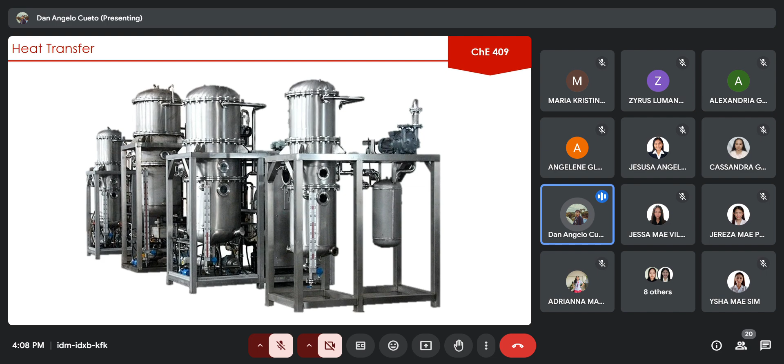To give you a formal definition, in evaporation, the vapor from a boiling liquid solution is removed and the more concentrated solution remains. So what happens here is that from a lower concentration na feed, nakakapag-produce tayo ng more concentrated na solution after the evaporation process takes place.

And in the majority of cases, the unit operation evaporation refers to the removal of water from an aqueous solution. So yun po yung basic concept na meron po tayo when we are talking about evaporation.

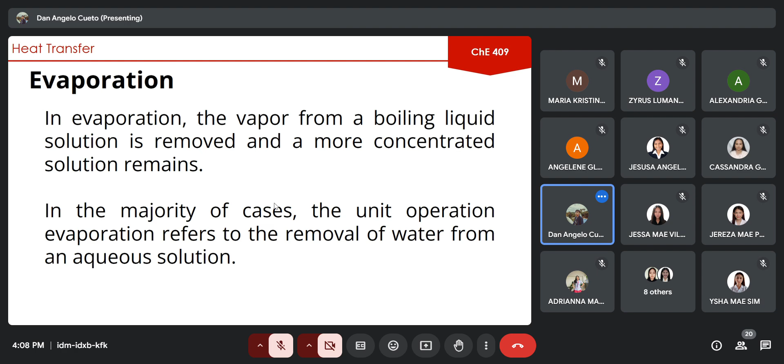So if meron sa inyong taga-Nasugbu or bandang Balayan, Nasugbu na yun. Kung alam niyo, meron tayo itong sugar industry, which is yung sa CADP, yung Central Azucarera de Don Pedro. So one of the major unit operations na ginagamit doon is itong evaporator, in which they produce yung baka nga yung asukal na kinoconsume natin is galing dun sa industry, galing dun sa manufacturing industry na yun.

So aside from sugar, meron din niya mga nakalista yan. Yan yung mga possible na maging product ng evaporators natin. Now, in these cases, the concentrated solution is the desired product and the evaporated water is normally discarded.

Now, in a few cases where ang water natin ay gagamitin pa natin sa mga susunod na process, yung water na nakuha natin dito sa evaporator via steam or via yung vapor na lalabas dun sa taas na part ng ating evaporator, ginagamit or nag-undergo pa siya ulit ng panibagong evaporation na process to further remove the solid particles na na-dissolve doon sa water natin.

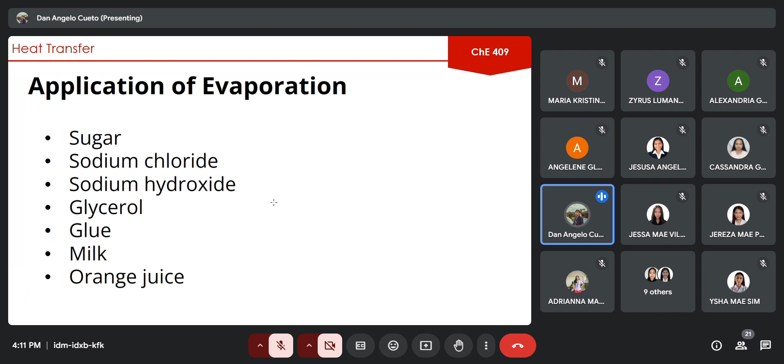Now, another application or another continuation of the evaporation process is yung tinatawag naman natin na crystallization, which is a special evaporation process. So yun yung sunod na unit operations na i-discuss natin after itong evaporation.

Now, moving on, there are some processing factors when we are studying evaporators na kailangan natin consider if you wanted to compute or find the total area needed or whether kung anong klaseng evaporator, anong type ng evaporator yung kailangan nating gamitin is once again nakabase dito sa mga physical and chemical properties na meron ang solution natin.

So ano ba yung mga properties na yun na nakaka-apekto sa processing methods under evaporation? Una na nga dito is yung tinatawag natin na concentration ng liquid natin. So when we say concentration, that is the amount of solute present in a given amount of solvent.

So kapag nag-undergo ng process ng evaporation, kadalasan ang liquid feed natin, kung sinabing liquid feed, yun yung pinapasok natin sa evaporator natin, liquid feed nga, and ito yung nag-undergo ng evaporation.

Itong liquid feed na ito, kadalasan ito ay relatively dilute. Kapag dilute siya, ibig sabihin mas mataas yung amount ng water, kaya magsasabi natin yung viscosity nito ay mababa. And since mababa ang viscosity nito, which is similar to water, mataas ang ating heat transfer coefficient. Isipin niyo para lang siyang tubig na may halong other chemicals.

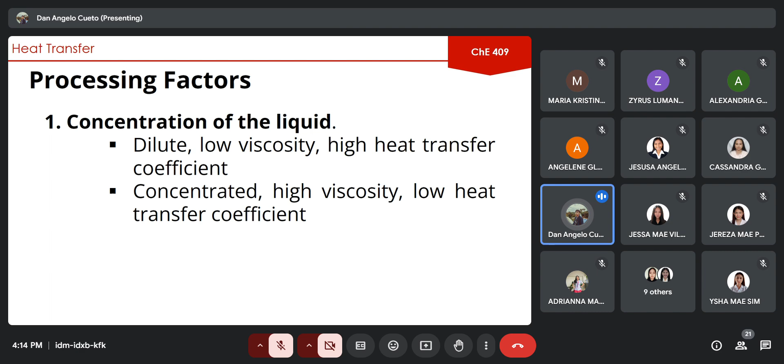Siguro na-discuss na rin naman sa inyong hapyaw itong property ng solubility na tinatawag. Kapag taas ng temperature natin, pagtaas din ng solubility na meron ang ating mga salts or yung mga gusto nating i-concentrate na mga solution.

Isipin niyo siya parang yung basic na example para makita ninyo yung property ng solubility. Diba, pagka room temperature na water ang gagamitin ninyo para magtimpla ng kape, hindi agad magdi-dissolve yung kape natin doon sa solvent natin na water kasi mababa ang kanyang temperature. But if we increase the temperature of our solvent, mas madami pong amount ng kape yung magdi-dissolve. So basically, that is yung property ng solubility natin.

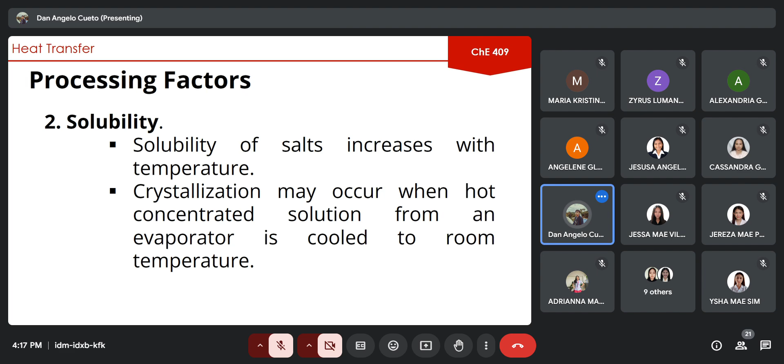Now next is temperature sensitivity of materials. This is also another factor na kailangan natin i-watch out when we are evaporating solutions. Many products, especially food and other biological materials, may be temperature sensitive and they might degrade at higher temperatures or after prolonged heating. That's why we also have to study kung ano ba yung gusto natin i-concentrate na solution, ano yung nilalaman na compound or element or pagkain ba siya. Kasi may mga products tayo na nagde-degrade at higher temperatures at sensitive sila sa pabago-bagong temperature changes.

Now, for example, yung mga pharmaceutical products natin, isa yan sa mga wina-watch out natin during evaporators kasi baka mamaya ang kalabasan na concentrated product natin is damaged na pala or hindi na siya yung pasok sa standard na kailangan natin. Another thing is yung food products natin such as milk or orange juice and other vegetable extracts. So tatandaan ninyo na ang amount ng degradation na meron sa ating food and other biological materials ay function ng temperature at ng length of time.

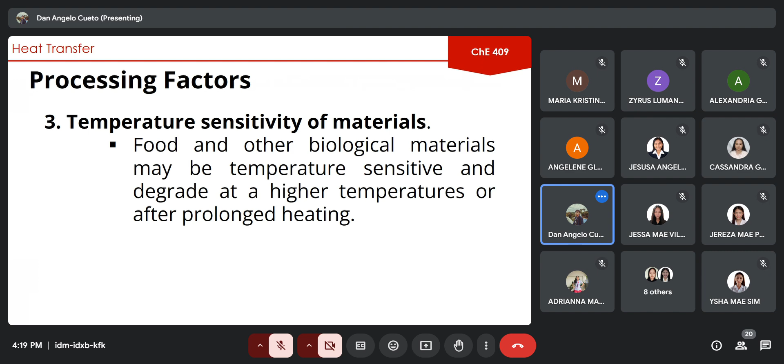Next naman is yung tinatawag natin na foaming or frothing. Ito'y nangyayari kapag yung mga pagkain natin such as skim milk and some fatty acid solutions ay kapag nagbo-boil ay nagpo-form siya ng foaming or frothing na tinatawag.

Siguro, nakapagluto na ba kayo ng sinigang? Siguro, or kahit kanin na lang. Di ba napapansin ninyo nagpo-foam yun dun sa taas kapag sobrang taas ng niluto ninyong kanin, and then yung tubig ninyo is sobra or umaawas, di ba? So yun yung tinatawag natin na foaming or frothing na sometimes wina-watch out din natin if may ganung property yung ating feed. Kasi it might affect the equipment na gagamitin natin.

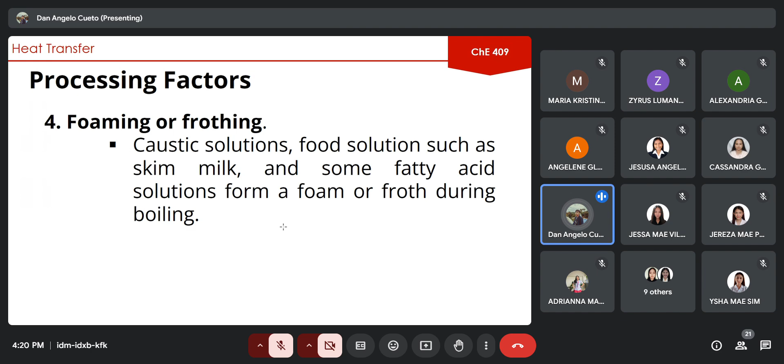Now, moving on, itong pressure and temperature, these two are the most important factors na kailangan nating i-watch out when we are calculating and considering the design for evaporators. Kasi itong pressure and temperature conditions ng ating evaporation process, ito yung magde-determine kung gaano kalaking area, kung anong klaseng evaporator yung ating gagamitin sa isang evaporation process. So one thing na kailangan ninyong malaman is that the higher the operating pressure, the higher the temperature at boiling.

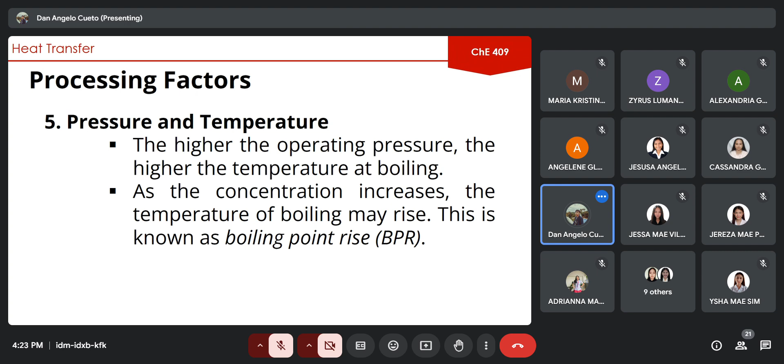And number 6 naman, na factor na kailangan nating malaman and matandaan is that some solutions deposit solid materials called scale on the heating surfaces. So think of it as fouling. Kung maalala ninyo ang ating heat exchanger, one thing na nakakapag-reduce ng heat transfer rate natin is the fouling coefficients or the fouling factor na meron sa ating heat exchanger. So dito rin sa evaporator, may mga solution tayo na nagde-deposit ng solid materials doon sa walls ng evaporator natin. At ang tawag natin doon sa solid material na yun ay scale na nakakapag-reduce sa heat transfer rate natin.

So sabi dito, this results to the decrease of the overall heat transfer coefficients and the evaporator must be clean. So because of scale deposition, nagkakaroon din ng downtime ng mga manufacturing industries dahil may mga scale na nade-deposit sa loob ng evaporators natin na kailangan malinis para yung heat transfer natin, yung calculations natin for heat transfer is hindi maging error yung calculations natin kapag nag-undergo tayo ng evaporation process.

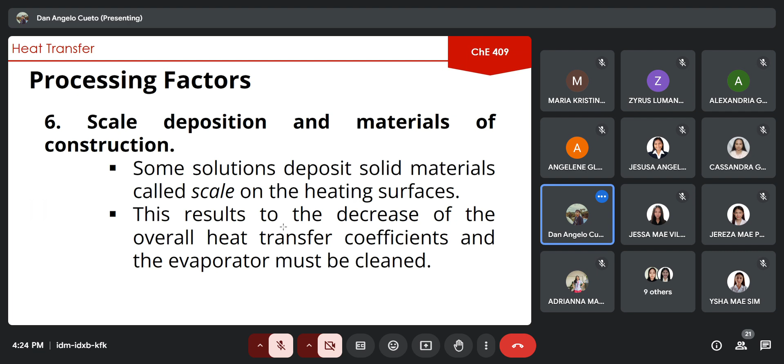Now, moving on with the general types of evaporators. Now, in evaporation kasi, what happens there is that heat is added to a solution para ma-vaporize natin yung solvent. Kadalasan yung solvent naman natin dito is si water. Na itong heat na ito is nanggagaling sa tinatawag natin na steam on one side ng ating evaporator, while dun sa isang side naman is yung evaporating liquid natin.

So think of it as parang may heat exchanger dun sa loob. Dun sa loob ng tubes ng evaporator natin, may dumadaan na steam. Na itong steam na ito yung nagpapainit sa ating evaporating liquid, nandun naman sa kabilang side ng evaporator natin. Na yung type ng equipment na gagamitin natin for evaporators ay nakadepende primarily on the configuration of the heat transfer surface and at the same time doon sa mechanism na ina-apply natin for agitation or circulation ng liquid natin.

Now dito sa presentation, may makikita kayong 8 general types ng evaporators natin. So hindi ko na naman masyadong pakaka-detailin kung ano ba ang ibig sabihin or para saan ba itong 8 evaporators na ito. You can confide with your peers, kasi makikita niyo rin naman itong mga ito sa peers ninyo kung para saan ba sila at ano ba ang purpose nila. But just so you know, isa lang naman ang kanilang concept: is to evaporate and to concentrate dilute solutions to produce a much more concentrated solution while removing the solvent content or the water content present on our feed.

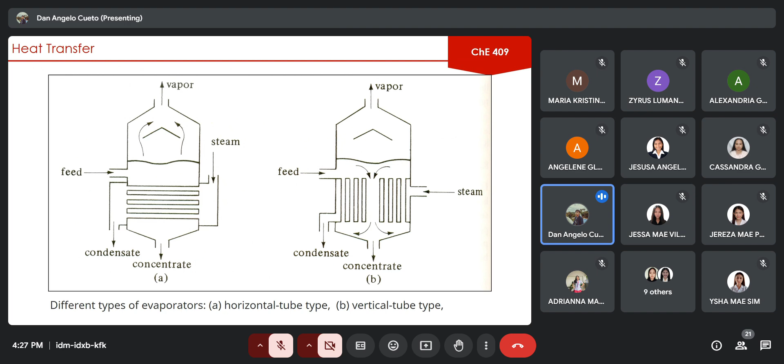So to show you some of the schematic diagrams or visual representations of our evaporators, you can see here, meron tayong horizontal tube type in which makikita niyo sa horizontal tube type is that ito yung dinadaanan ng ating steam. Ito naman sa kabila ay vertical tube type. So makikita niyo dyan kung paano ba ang flow din ng feed natin as well as ng steam natin. Next naman ay long tube vertical type.

And then forced circulation type. Itong forced circulation type, mapapansin niyo may pump na nakalagay dito sa bottom na part ng ating evaporator. So itong pump na ito yung nag-circulate ng ating feed dun sa loob ng evaporator natin para mapataas natin yung heat transfer coefficient na meron yung ating liquid. So itong unang 3 type ng evaporator ay walang pump na ginagamit, so they rely more on gravity as well as yung inlet velocity na meron ng yung ating liquid para mahalo siya.

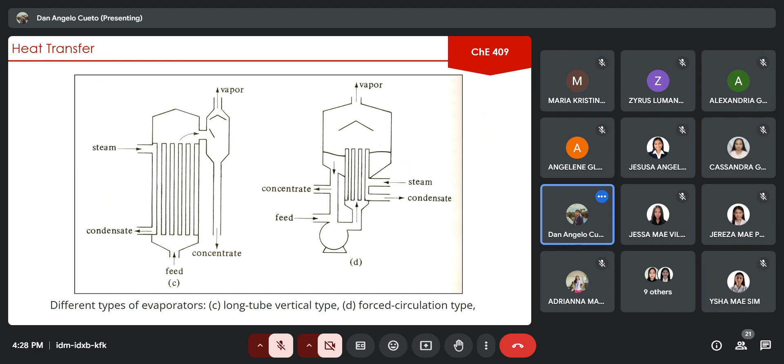So methods of operation of evaporators. Itong methods of operation of evaporators natin pertains to how these evaporators are used inside the manufacturing industries natin.

Una na nga dito is yung pinakasimple na single effect evaporator, in which parang stand-alone evaporator lamang siya. May pumapasok na feed, may pumapasok na pang-init ng feed, may lalabas na vapor sa taas, at may lalabas na steam condensate at may lalabas na concentrated liquid natin.

Na ito namang forward feed multiple effect evaporators, so itong backward feed multiple effect evaporators, this pertains to many evaporators in series.

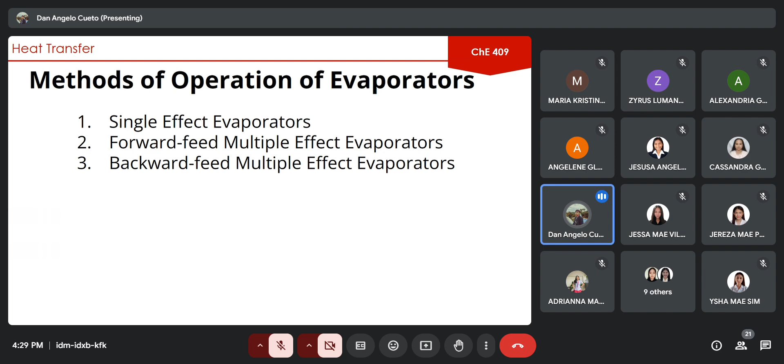Kung yung una ay isa lang na standalone, itong second and third, ito ay maraming evaporators in series. Ang pinakaiba lang nila is paano ba natin ipapasok yung feed, siya ba ay in the same direction of the steam or in opposite direction of the steam? Kaya meron tayo ditong forward feed at saka backward feed na multiple effect evaporators.

To discuss single effect evaporator, which is ito rin yung focus ng discussion or ng calculations natin, kasi yung multiple effect evaporator is sobrang haba, and sa tingin ko kulang 2 oras o 1 oras para mag-solve ng problem na yun. Though, if may time tayo in the next few weeks, I will be discussing kung paano mag-solve nitong multiple effect evaporator. But for now, and tomorrow, ang focus ng computation natin is single effect evaporators.

Now, anong meron dito sa single effect evaporator natin. Dito sa single effect evaporator natin, these are often used when the relative capacity of operation is relatively small and/or the cost of steam is relatively cheap compared to the evaporator cost.

Now, itong single effect evaporator is hindi naman kadalasan ginagamit sa mga manufacturing industries. Though may ilan pa rin makikita siguro kayo na gumagamit itong single effect, hindi kasi siya efficient na gamitan kung nag-iisa lang siya at standalone lamang siya.

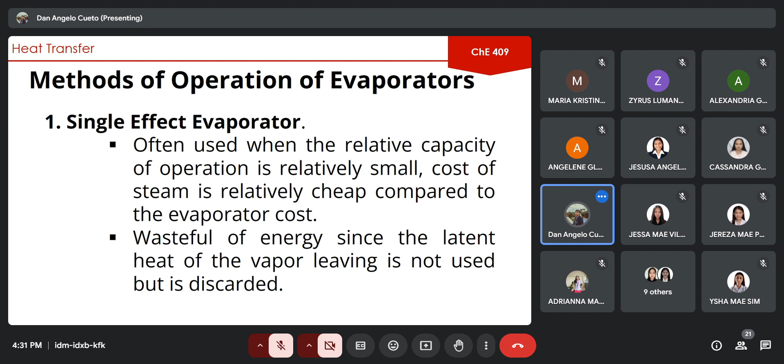So here naman is how you draw an evaporator. Pag nagpa-problem solving tayo, mas magandang i-drawing din yung ganitong itsura ng evaporator natin, para makita ninyo at malaman ninyo ano ba yung mga properties na kailangan nating kunin, masolve at hanapin. So mamaya makikita ninyo yung sinasabi ko.

So in this diagram, makikita nyo naman dyan, yung feed natin enters at a temperature T sub F, as you can see naman dyan sa diagram, and meron tayo dyan saturated steam at T sub S, which enters the heat exchange section.

So basically, may dalawa tayong input sa evaporator natin. Okay? One is the feed, one is the saturated steam.

After the steam enters the evaporator, syempre, itong saturated steam na ito ay magko-condense para makapag-produce ng liquid na lalabas doon sa kabilang side ng evaporator natin. Ang tawag natin dito ay condensate.

Itong condensate na ito, same lamang yung temperature ng sa saturated steam natin. But hindi na siya saturated steam. Siya ay condensed, condensed liquid na siya.

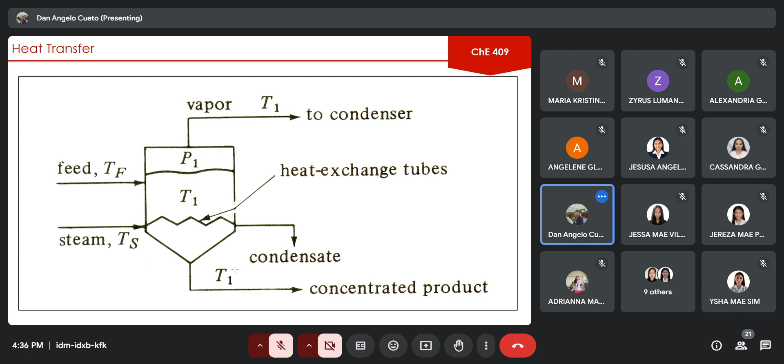Now, the formula to compute for the heat transfer rate sa ating evaporators is just the same with what we've used in the heat exchanger discussion. So meron tayo dito, Q is equals to UA delta T. Si Q ay si heat transfer rate in watts. U is the overall heat transfer coefficient in watts per meter square Kelvin. A is the heat transfer area. And itong delta T natin is composed of T sub S and T sub 1. Si T sub S, this is the temperature of the condensing steam. And si T sub 1 naman is the boiling point of the liquid.

Basically, hindi na bago sa inyo itong formula na gagamitin natin for evaporator. But syempre, there are other formulas pa na gagamitin natin para makuha yung ilang mga properties, yung ilang mga variables dito sa equation na ito.

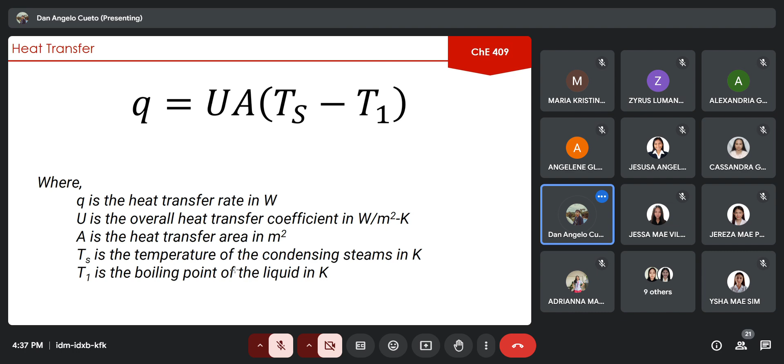So let's proceed naman with the next method of operation, which is the forward feed multiple effect evaporator. Kapag sinabi natin forward feed multiple effect evaporator, syempre marami yung evaporator, so we can call that as effect 1, effect 2, effect 3. That pertains to the different evaporators natin. So pag sinabi natin sa first effect, yun ay sa unang evaporator natin in series. Sabi dito, kaya siya tinawag na forward feed is because the fresh feed is added to the first effect and flows to the next in the same direction as the vapor flow.

Para makita ninyo, tingnan nyo muna kung ano ba yung itsura ng forward feed na multiple effect evaporator. Yung feed natin pumapasok dito sa first effect, lalabas dito sa baba as the concentrate from first effect, at siya yung papasok as the feed papunta dun sa ating second effect. Yung vapor naman natin, siya yung magsaserve as the heating medium na meron tayo dito sa ating second effect. Kaya may pupuntahan yung vapor natin pagdating sa multiple effect evaporator, unlike dun sa single effect na i-discard lang natin yung vapor after using it.

Going back, this operation is used when the feed is hot or when the final concentrated product might be damaged at high temperatures. Ginagamit natin itong forward feed multiple effect evaporator kung ang ipapasok natin na feed doon sa first effect ay mataas ang temperature, kasi para malessen natin yung heat loss na meron sa ating heat transfer. Kaya doon sa first effect, mainit na kaagad na feed yung isinasalang para yung heat loss natin ay hindi very large as compared to pag malamig na feed ang pinasok natin sa unang evaporator. Kasi kapag malamig na feed ang pinasok natin doon sa unang evaporator, kinakailangan pa niya ng certain amount of heat para siya tumaas at mag-boil. Whereas kapag mataas na agad yung temperature niya at yung steam na papasok, syempre mainit na kaagad yun. So ultimately, konting oras lang yung kinakailangan para makapag-boil yung first feed natin.

At as it moves doon sa ating multiple effect evaporator, yung temperature natin, yung boiling point temperature sa loob, tawag dyan, bumababa. Ano po? Kasi syempre, nag-start ka from mataas, you don't expect naman na tataas din yan dito sa sunod na effect. Syempre, bababa yan after some time has passed. So yan, nakalagay naman dito, the boiling temperature decreases from effect to effect. This means that the pressure wherein dun sa unang effect natin ay 1 atmosphere or yung absolute pressure natin, and sa last effect naman will be under vacuum at a pressure of P3 or P sub 3. So pababa naman yung pressure natin as we proceed from one effect to another.

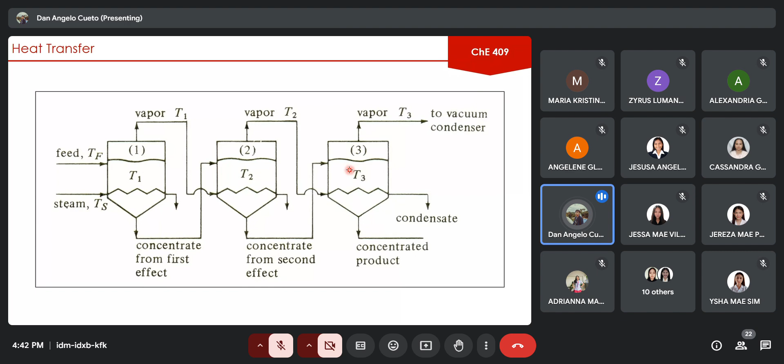Now, for the third method of operation, we have the backward feed multiple effect evaporator. Dito, the fresh feed enters the last and coldest effect and continues on until the concentrated product leaves the first effect. This method of reverse feed is advantageous when the fresh feed is cold, since a smaller amount of liquid must be heated to the higher temperatures in the second and first effect.

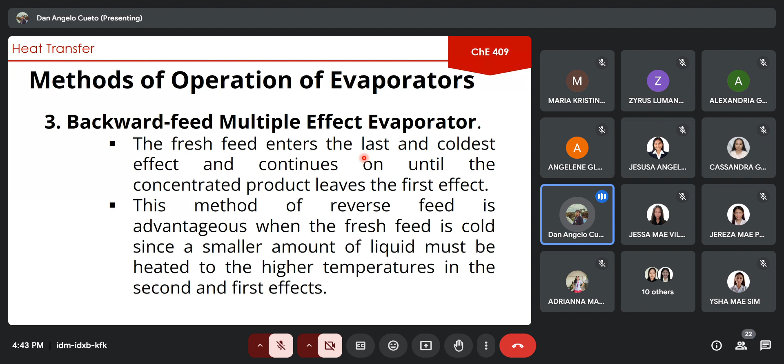So kanina, sa first effect natin, mainit na dapat yung papasok sa feed natin sa first effect. Ito naman, cold feed yung pinapakain natin sa evaporator. Na lamang, instead of the first effect, dun sa third effect natin ilalagay yung feed natin.

So take a look at this diagram. Mapapansin niyo na dito sa third effect yung feed natin, papasok yan sa evaporator, bababa, lalabas yan as concentrate. And then as you can see here, may symbol tayo dito ng pump.

Kasi ang nangyayari dyan, after processing from the third effect, ipinapump siya papunta dun sa second effect natin kasi mas mataas ang viscosity na ng ating concentrate. Kaya may pump po tayo dito sa backward feed multiple effect evaporator.

Now the essence is the same with our forward feed multiple effect evaporator, in which makakapag-produce tayo ng concentrated product after a series of evaporators na lamang cold feed siya. Tatandaan, cold feed, and at the same time we use pumps to transfer the evaporating liquid from one effect to another.

Liquid pumps are used in each effect since the flow is from low to high pressure. And this operation is used when the concentrated product is highly viscous.

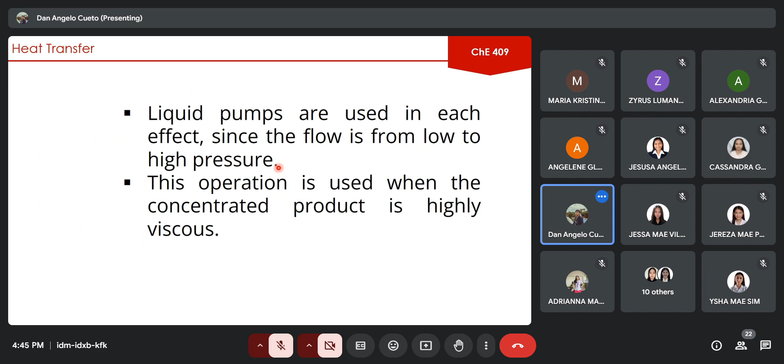So yun po yung tatlong methods ng operation ng ating evaporators. Again, the single effect, the forward feed multiple effect evaporator, and the backward feed multiple effect evaporator. Now, for the calculation methods for single effect evaporator, there are a lot of things that we have to find.

There are a lot of things that we have to consider when computing, for the heat transfer, the area, or the boiling point of our solution. So unahin muna natin ang feed. Ano ba yung mga kinakailangan natin malaman sa feed natin?

Una is the symbol F. The capital symbol F stands for the feed, or the mass flow rate ng feed natin in kilograms per hour. Next is X sub F, which is the mass fraction of solids present in our feed. So think of it as the amount of solute present in our solvent.

Now, T sub F naman is the temperature of the feed in Kelvin, and H sub F is the enthalpy of the feed in joules per kilogram.

Now, itong enthalpy of the feed, nakadepende yan sa kung ano yung solute na present doon sa ating feed. Sometimes kasi ina-assume natin na same properties lang with water yung ating feed.

Kaya ginagamit natin dito na formula to get the enthalpy of the feed is simply CPF times the change in temperature, which is ang ginagamit natin for CP, or the specific heat capacity, is that of water, which is 4.184.

Tatandaan niyo ito ha, halos si feed at saka si liquid ay halos same yung mga property na kinakailangan nating alamin. Now next naman is our vapor, which leaves doon sa taas na part ng evaporator natin. Itong vapor natin also has the symbol V, which stands for the mass flow rate of our vapor leaving as pure solvent. So itong V na ito, yung vapor natin, ay kadalasan kinoconsider natin siya as water.

Ang kanyang temperature, si T sub 1, this is the temperature of the vapor, which is the same with the boiling point temperature inside our evaporator. Now itong si H sub V, this is the enthalpy of the vapor at T sub 1. Since our vapor is water, para mahanap natin si enthalpy ng vapor, kinakailangan natin ang boiling point temperature natin.

So gagamit tayo ng tinatawag natin na steam table. Siguro naman ay na-encounter at nagamit niyo na si steam table, right? Kagaya ng ginagawa natin sa kay air, hinahanap natin yung properties ng vapor natin.

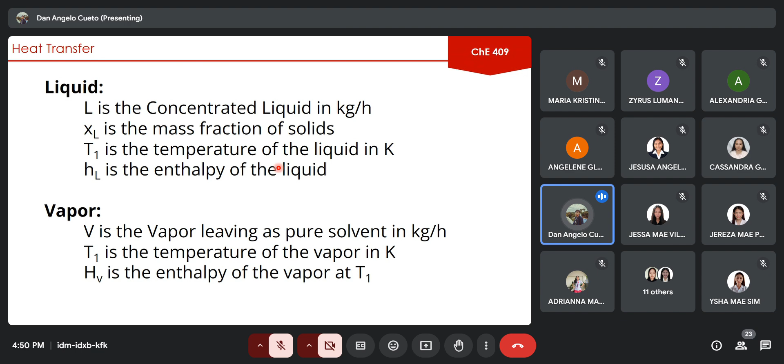Now moving on, ano pa ba? Meron na tayong feed, meron na tayong liquid, may vapor na tayo. Yung sa steam naman ang pag-usapan natin, yung steam side ng ating evaporator. So pagka sinabi nating steam, meron tayong papasok na saturated steam at may lalabas tayong condensed steam o yung condensed liquid natin. For saturated steam, we have capital letter S as the mass flow rate of our steam entering.

T sub S naman is the temperature of the steam in Kelvin, kadalasan given din. Itong H sub S naman, this is the enthalpy of the saturated steam at T sub S. So capital letter H yan, mapapansin niyo kasi magkaiba pa ang H sub S na capital at small letter h sub S. Itong isa is for saturated steam, ito naman is for saturated liquid.

Na kung alam niyo sa steam table natin, may section tayo doon na part for liquid, part liquid, part vapor o part steam. Ituturo ko din yun sa inyo pag nag-solve tayo ng evaporator problems. So itong saturated steam at condensed steam, hindi rin naman nagkakalayo ang properties na kailangan nating malaman. Nga lamang, sa pagkuha ng enthalpy ng steam natin, doon lang tayo medyo magkakaiba. Though same yung temperature na kina-consider natin, iba yung titingnan natin sa steam table.

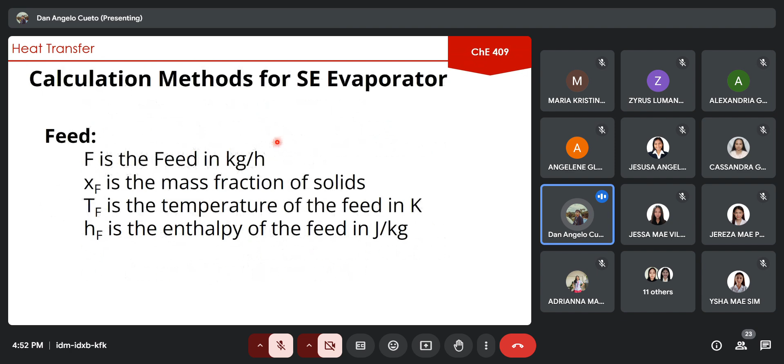Kasi kaya ko yun sinabi kasi mahalaga yung susunod na part kasi magbabalance tayo dito. Kung na-encounter niyo na o feel ko naman na-encounter niyo na si material balance, right? So magma-material balance din po tayo dito kay evaporator para malaman natin yung iba't ibang values, itong iba't ibang property na kailangan natin for evaporator.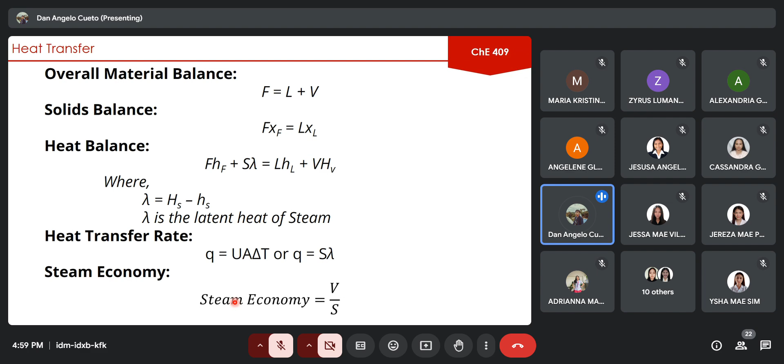Yeah, so sa part na ito, some of the assumptions na pwede nating gamitin kapag nagsosolve tayo ng evaporator problems. It can be demonstrated as an approximation that the latent heat of evaporation of 1 kilogram mass of the water from an aqueous solution can be obtained from the steam tables rather than the equilibrium temperature for pure water at P1.

Basically ang sinasabi lang nito guys is para makuha natin ang latent heat na meron tayo, kinakailangan nating alam natin yung temperature T1 or yung boiling point temperature natin. Kasi doon tayo magbe-base ng ating tawag dyan, magbe-base ng mga enthalpies ng feed, liquid, etc.

Now, if the heat capacities of the liquid feed and of the product, which is CPF at saka CPL, we can use them to calculate the enthalpies. Minsan, pagka hindi given itong specific or itong heat capacities na ito, magbe-base tayo sa charts na papakita ko sa inyo after nitong slide na ito, if I'm not mistaken. So baka maduling ulit, kaya na nangyari sa heat exchanger.

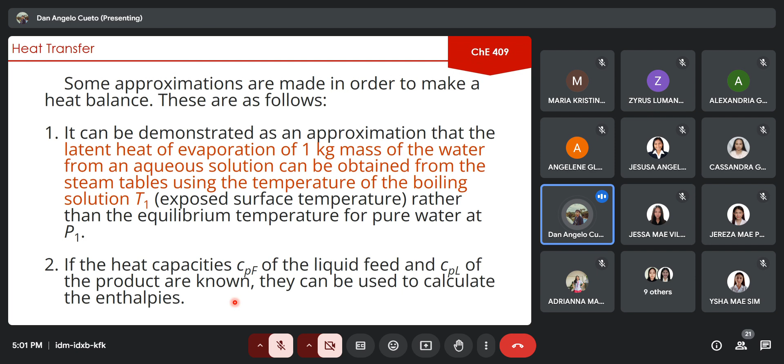Basta yun, i-guide ko naman kayo pagka nag-problem solving tayo para alam niyo paano kuhanin yung mga properties na iyon, yung mga variables na iyon, yung mga na-discuss ko kanina, yung enthalpy. Diba? So ito isang problem na isosolve natin sa evaporator.

Boiling point rise. Napag-usapan natin itong concept ng boiling point rise. Now, in the majority of cases in evaporation, the solutions are not such dilute solutions. And in most cases, the thermal properties of the solution being evaporated may differ considerably from those of water.

Gaya ng sabi ko sa inyo kanina, may mga examples tayo, kagaya nitong unang example natin, na ihahalintulad natin ang ating feed at ang liquid at ang concentrated liquid natin sa water na properties. Therefore, if ihahalintulad natin sa properties ng water ang ating liquid at ang ating feed, makukuha natin ang kanilang enthalpies based on the temperature of our feed and based on the temperature of our liquid.

Which is madali lang siya. Kasi nga, alam naman natin ang properties ng water. Ang kanyang heat capacity is simply 4.184. Diba? Pero may mga solutions tayo na hindi naman natin pwedeng i-consider na ang properties ng solution na yun ay kaparehas ng water. Kasi hindi na siya very dilute solution. Kasi kita nyo, itong unang problem natin, 1% lang, papuntang 1.5 weight percent. So basically, 99% ay water or 98.5% dun ay water. Kaya pwede natin siyang ihalin tulad o igaya sa property ng water natin.

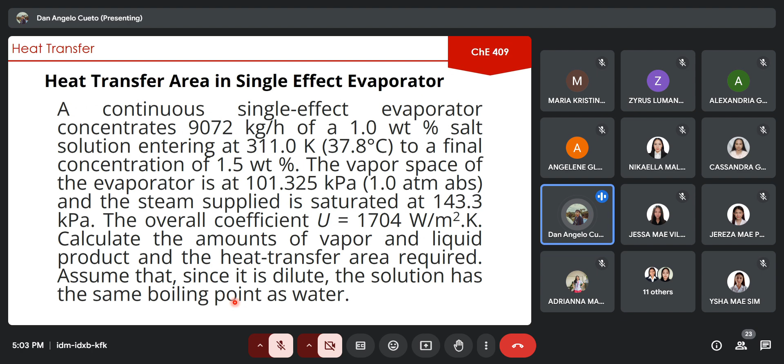Now, kapag hindi siya kaparehas ng property ng water natin, gagamit tayo nitong BPR to determine the exact boiling point of our evaporator, of our evaporating solution. Kasi kung water siya, kung ihalin tulad natin siya sa properties ng water, ang boiling point ng ating solution sa T1 ay equal sa 100 degrees Celsius. So paano ba natin makukuha yung boiling point rise or yung BPR na tinatawag para makuha natin ang boiling point temperature?

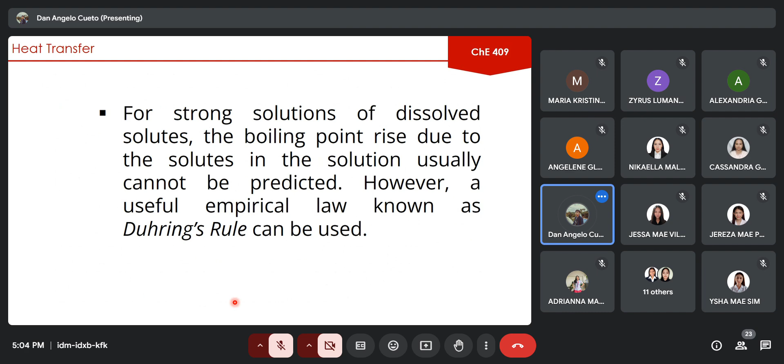So for strong solutions of dissolved solutes, the boiling point rise due to the solutes in the solution usually cannot be predicted. However, a useful empirical law known as the Duhring's rule can be used. Itong Duhring's rule na ito is given to you by this graph.

Dito, itong Duhring line na ito is only available or applicable for sodium hydroxide. But sa Perry's ninyo, if I'm not mistaken, sa chapter 11, meron boiling point BPR rise chart doon for various salts. Itong pinapresent ko sa inyo sa slide na ito is specifically for sodium hydroxide lamang. So if I were you, have a copy of this Duhring line, search nyo lang sa internet, Duhring line for sodium hydroxide, para pagka nag-solve tayo tomorrow, mas madali po ninyong mapo-point out yung mga values na kailangan natin dito. So yung makikita nyong line dyan, that pertains to the different percentages of sodium hydroxide present in our solution.

So saka ko na i-discuss kung paano yung gamitin. Just to know that ginagamit itong Duhring lines na ito to get the boiling point of our solution kapag ang solution natin ay nagko-contain ng sodium hydroxide.

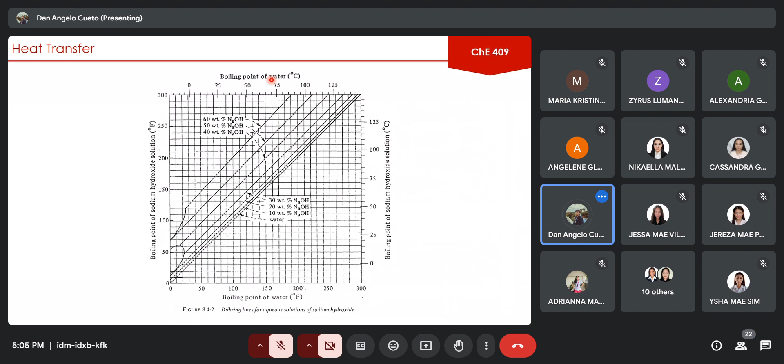Now, another thing, or another concept that you need to know is ang tinatawag na enthalpy concentration charts of solutions. Itong enthalpy concentration charts of solutions ay ginagamit if we wanted to find the enthalpy of our feed and the enthalpy of our liquid or our concentrated liquid. Sabi dito, if heat of solution of the aqueous solution being concentrated in the evaporator is large, neglecting it could cause errors in the heat balances. Kung ika-cancel lang natin yung HL at HF, it will result to erroneous calculations or erroneous results. So to get the enthalpies of the feed and liquid, we use enthalpy concentration charts of solutions such as what is shown in the next slide.

So to show you what is an enthalpy concentration chart, this is for a system of sodium hydroxide and water. Kapag ang solution natin has the components of sodium hydroxide and water, ito yung ginagamit nating chart to get the enthalpies of the specific weight fraction na meron tayo sa sodium hydroxide.

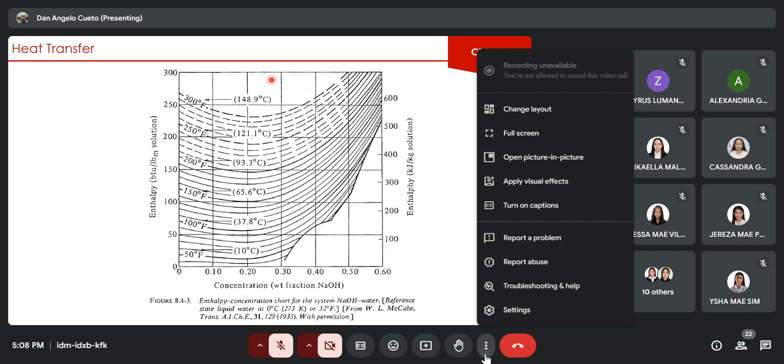So, katabi nyo ba mga Perry's nyo? Kung katabi nyo Perry's nyo, i-buklat-buklat ninyo. Kamustahin nyo naman, baka namimiss na kayo ng Perry's ninyo.

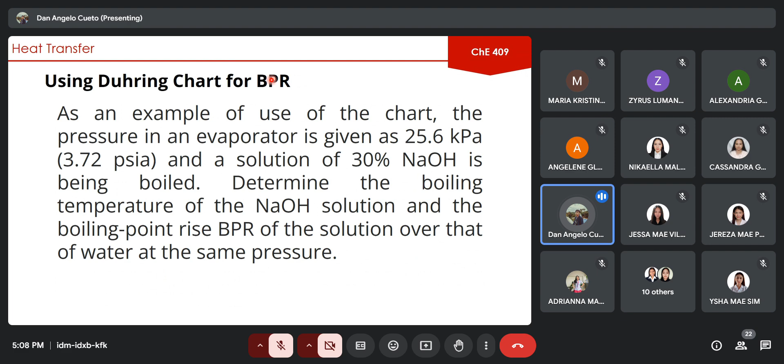Problem na tong sunod: Using Duhring chart for BPR at evaporation of NaOH solution using boiling point rise. Itong problem na ito, tuturuan ko kayo paano gumamit ng Duhring chart, tsaka nung BPR na nasa Perry's ninyo, which hindi naman siya mahirap, nakakalito lang siya, kagaya ng heat exchanger. But still, doable naman siya kung gagawin natin. Ito namang evaporation of NaOH solution, ito naman ay kung paano natin gagamitin yung BPR, yung boiling point rise na concept, in solving evaporators.

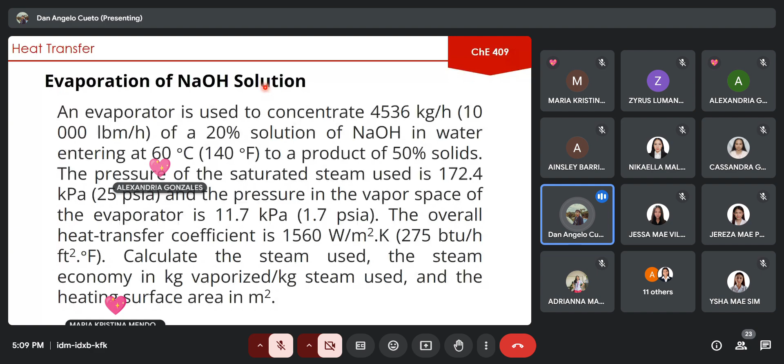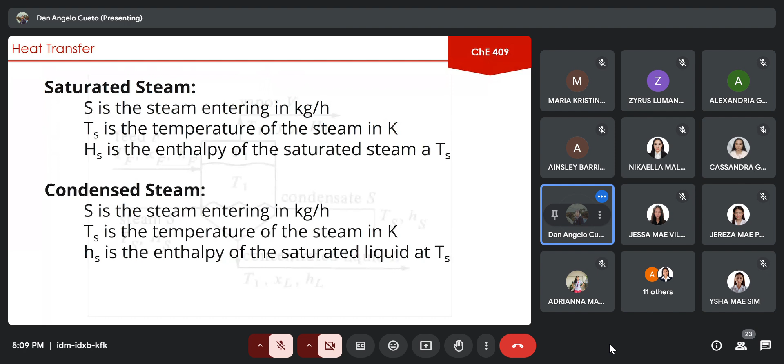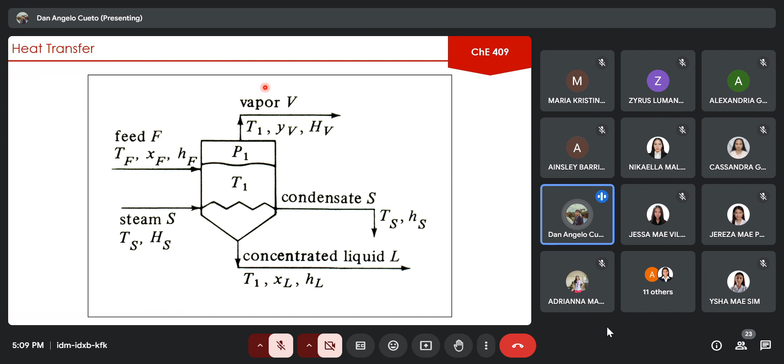So if I'm not mistaken, dito na nagtatapos ang discussion natin. Kasi hindi ko naman madi-discuss ang problem sa inyo kasi sobrang haba din ito. Kailangan ng face-to-face na problem solving nitong evaporators. But sana naintindihan niyo yung concept ng evaporators at itong mga properties, itong mga TF, XF, HF, T1, TS, HS dito sa slide na ito. Kasi yan yung ma-encounter natin when we are solving for the heat transfer rate, the area of evaporator kapag discuss tayo tomorrow. So do you have questions ba?